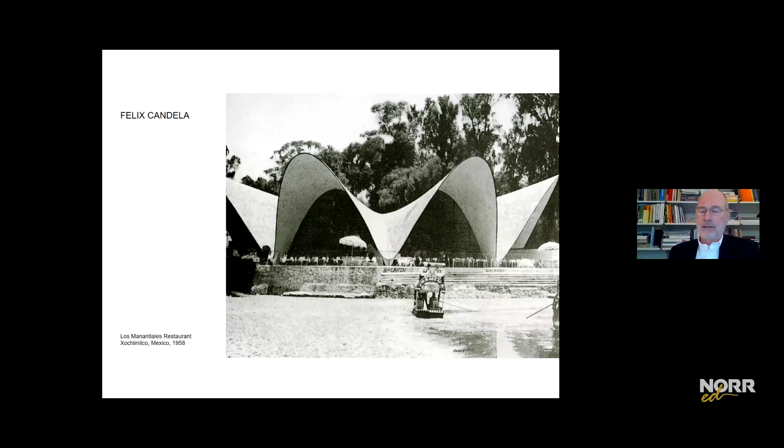Or the work of Felix Candela, which is these incredible hyperbolic paraboloid shells with amazingly thin edges, that has been there for quite a while, since 1958.

Now, in recent times, I have to say there's been some additions, but I'm not quite sure how to describe them. Is it about a purity of structure, or just what is it we can do?

And this makes me think about the movie Brazil, and I urge all the young architects on the call to watch the movie Brazil. It has a lot of architectural overtones.

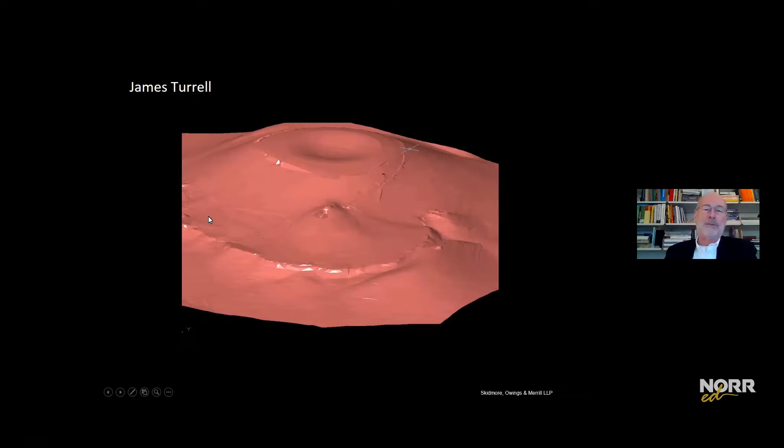The nature of the design, the purpose of this is to essentially be a lunar observatory to watch moonrises and moonsets for the next 2,000 years. It has a dome over the top, and in section it has this 40-foot diameter, 12-meter sphere where the light from the moonrise comes and projects against the back surfaces. There's a lens in the front, and when we got involved, James had the ideas together, but it was a bit of a train wreck.

Things were kind of crashing. There were a lot of ideas, a lot of things there that were kind of getting jumbled together. So what we focused on was giving it a hierarchy, where when things had a conflict, the sphere was alpha. It was number one, it got the right of way, followed by a cylinder around the outside, that was number two. In the process, we made it organized.

Then James and I were making a presentation to a potential donor, and I described what SOM brought to the table was Miesian order. Now, I said that because I grew up in an office where a lot of people came into Mies van der Rohe's office. Some of my mentors were important players in Mies van der Rohe's office. So I said that, we gave this Miesian order, and James corrected me.

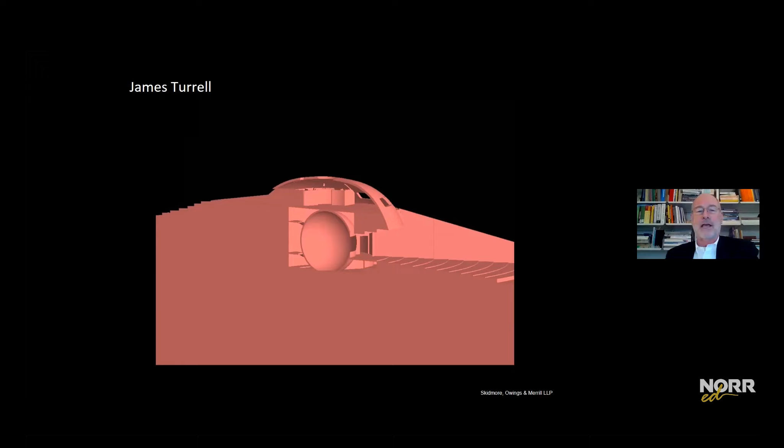Since I'm not Quaker, I can make a very gross generalization of some of their Quaker values. But can you imagine that if you were a young boy raised to believe in simplicity in speech, clothing, food, and your mother always said to you, 'step into the light.' And then later you became an artist, maybe no longer religious, but you were raised with this ethical situation. What might you create?

Here is one of James's creations. What you see here floating before you is a pyramid of light, and it is so simple that it doesn't even exist. This pyramid is created by your eye. What it really is, you have light behind the wall that's illuminated. You see it in the corner of the room, and it is your eye itself that creates the pyramid.

So I look at this artwork and I see it as the manifestation of these values in which he was raised, of simplicity and stepping into the light. And that made me start to think about what is it that I value, or what is my ethical position, not unrelated to aesthetics, and how does that affect my aesthetic position? So I started to examine the things that I value.

Here's another project we did with James down at Rice University a few years ago. Once again, simplicity and light. So I proposed for myself a set of values that I think were the things that I value and how they relate to art and architecture and engineering. As an engineer, I believe in efficiency.

It's great, it's terribly rewarding. It's kind of what we're trained to do as engineers, to do something efficiently.

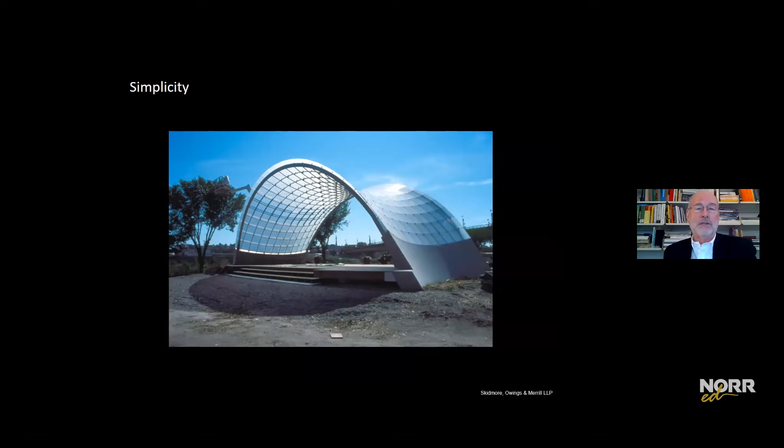Or simplicity, such as this band shell we did with Jamie Carpenter. Or minimalist—I like minimalism, such as Mies's Farnsworth House near here in Plano, Illinois. Or economy.

This is the Exchange House project in London, mentioned earlier. This is amazingly, for what it's doing, an efficient structure. It spans 78 meters over the trains coming in and out of Liverpool Street Station. Without an efficient structure, it would still probably be open to the sky, a kind of a wound in the middle of the city of London.

I believe in elegance. As you go across the prairies here in the Midwest or in Western Canada, you see these incredibly elegant irrigation systems—totally functional, but totally elegant.

I believe in utility. You go back to Vitruvius, his three values: utilitas, firmitas, venustas—utility, firmness, and commodity, and delight.

I believe in that—things should have a harmony, a rhythm to it. I believe in hierarchy and order, but not in the hierarchy of ideas. I don't care who the ideas come from, a summer intern or a partner, doesn't matter. But I do believe there's a hierarchy and order to how we tell the stories of our buildings, and not everything is equal. I'll speak to this more later.

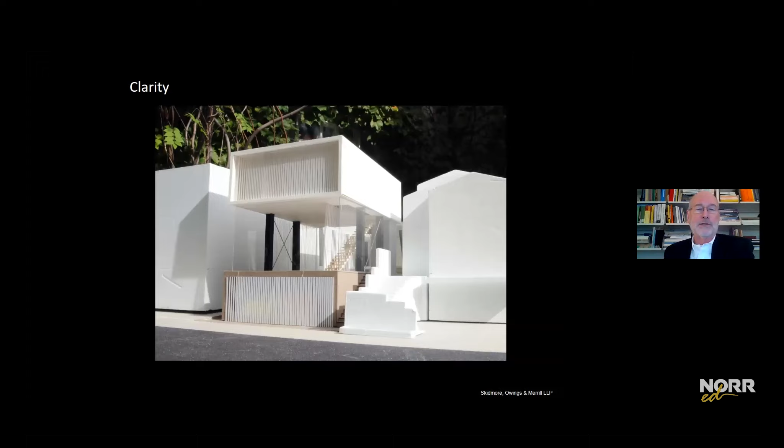I like clarity—I like where you can see what is happening, and how the loads for this residential project I worked on with Jeanne Gang, where we're trying to take the seismic loads, this is in California, from this sleeping unit above down to the living unit below.

Proportions, very, very important. This is a house I did with Thomas Phifer in New York.

Appropriateness—now it's hard to come up with what's appropriate, so I found a photograph of something which is, for me, totally inappropriate. I hate when people use structure as decoration and not the real thing. Whoever built this house definitely wanted it to have a colonnade up front, so here you have it—makes no sense structurally. I think it should be appropriate, and try to avoid inappropriateness. And for the life of me, I can't figure out how that garage works either.

I do like rational designs where it's very clear and organized, such as the John Hancock building here in Chicago.

One of the things I think is important in my position is that if you want your design to actually get built, you should have at least one idea of how to build it. I think this is a very important part of the design process—considering how it's going to be built, and making that integral to your design.

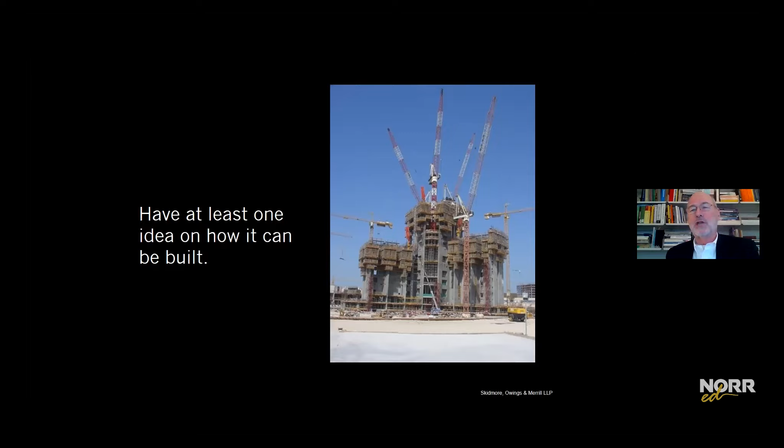That was true of Exchange House, or this is the construction site of Burj Khalifa. We had formwork on this project that was used 160 times, and that was central to the original design.

For the young architects and engineers on the call, don't be afraid to re-examine past systems and solutions. Seems like every time I work with a young designer, they would like to do something that's never been done before. Well, don't constrain yourself that way, because one could say the chair problem has been solved—there's no need to ever design another chair.

Well, Corbu had another idea, and there are other ideas within a fairly narrow design problem. Okay, some places you sit, sometimes you've got a back support, sometimes you don't—but a very narrow design problem. In fact, right now I'm trying to work on the design of a chair. It's quite a wonderful exercise to go and replow the field that's been plowed by so many other people in the past.

Another thing I find very helpful is what I call describing your design in words. But you don't want to do this too early. One of the things I do when working on a project, when I think we've got it kind of figured out—when it's starting to come together and the ideas are starting to gel—I try to describe it in words. And if it takes too many words, maybe I'm not there yet.

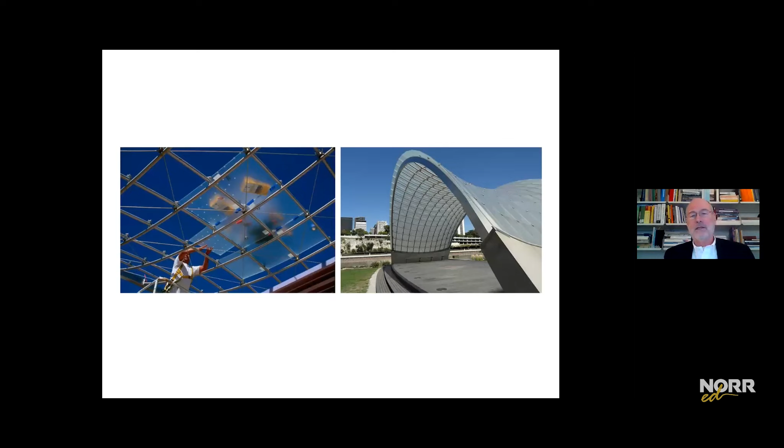Or the simplicity and clarity of this art piece we did with James Turrell, or the Jamie Carpenter band shell, or this Tower of Hope that we did with Jahn.

A very, very important topic, which I don't think is addressed nearly enough, is the issue of scale and form.

Let's start with issues of scale. On the left is a drawing actually made by Galileo, I think in 1638 or thereabouts. You look at this, and is that right? Well, it turns out, depending on your assumptions, it is right.

If you had a bone that was a cantilever, say cantilevering out of my hand, and let's say it's right at the breaking stress, and it's solid, and for the moment round, and the weight on it is its own weight. So if I decide to make it 3 times longer, as in this drawing, it has to get bigger. But as I make it bigger, it becomes heavier. So under that set of rules, if I make it 3 times longer, it has to be 9 times wider.

And that's what Galileo has done here in his drawing experiment. And of course, the very famous book by D'Arcy Thompson on Growth and Form. I've got, I think, probably 3 copies—one in my downtown office, one in my home office, and another in the living room of my house.

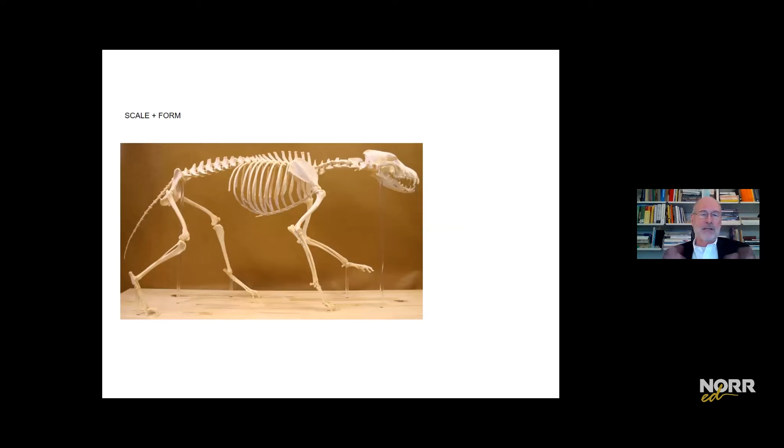And certainly as you scale things up from, let's say, here is a small mammal, if you go up to the scale of a large mammal, the proportions change.

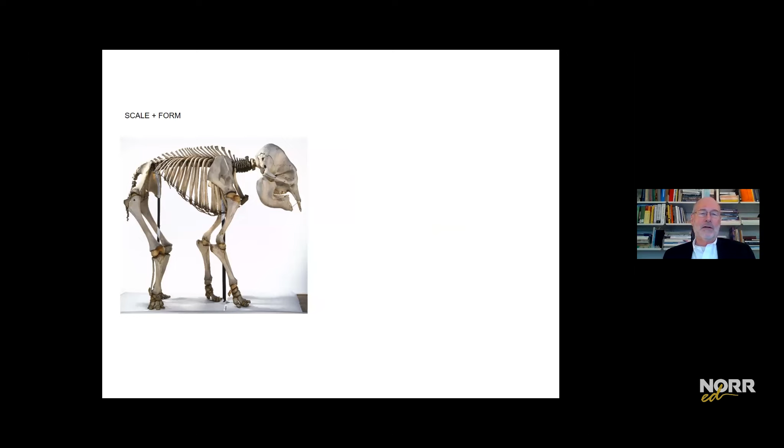As you scale up, another reference for me is Myron Goldsmith, going back to an essay he did for his master's thesis under Mies van der Rohe, on issues of scale in tall buildings. It has some very seminal ideas that he repeated in his monograph from Rizzoli.

Going back to Myron, when he did his thesis under Mies van der Rohe, he talked about issues of scale. He has a series of drawings of bridges depending on the span, with different solutions, and asks: what is the appropriate solution for that scale?

Now, this thesis was done in 1953, and you'll notice there's a very common structural system that was not common then, that's not on the chart. You might notice there are no cable-stayed bridges here, which have since become dominant.

Even though the idea had been around for a while, it really became prominent after World War II, when the Allies managed to blow up all the bridges across the Rhine, and some very brilliant German engineers needed to span these rivers with very efficient structures. That's when the cable-stayed bridge came into prominence.

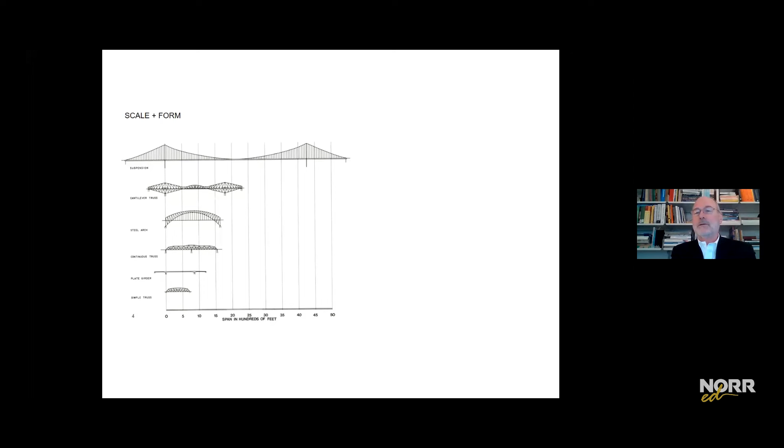So when I look at these, I think of them not as solutions or systems, but perhaps as species, like animal species. Unlike nature, where one species evolves from another, we in design—architects and engineers—can create a whole new beast, animal, or species just by creativity and respecting physics.

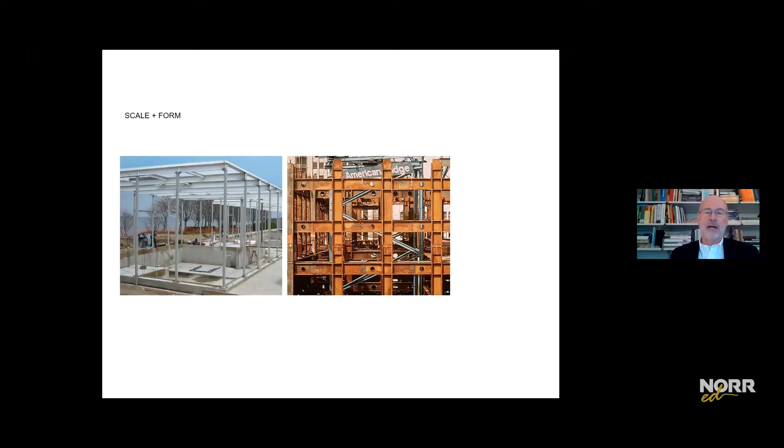And certainly scale and form shows up—on the left is the scale of the bones of this house we did with Tom Pfeiffer, and on the right, the scale of the bones of the Willis Tower, the Sears Tower.

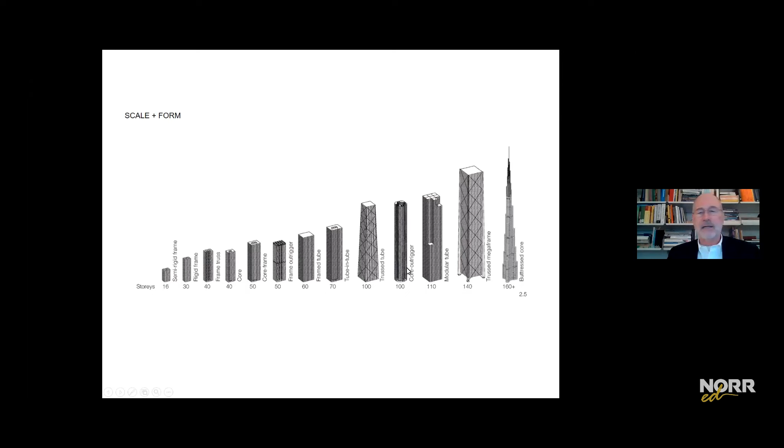And so when you look at a chart like this that was started by Fazlur Khan, I think inspired by the work of Myron Goldsmith, we have these different species of potential solutions for tall buildings, depending on how many stories there are or how tall they are.

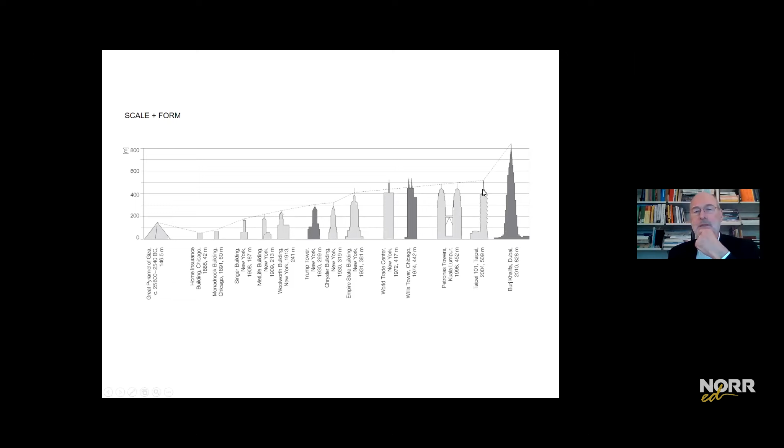And certainly over time, we've been able to evolve in the height of buildings. Here's a chart of nominally some of the tallest buildings in the world in their era. You might notice that the Burj Khalifa is substantially taller than whatever came before it. The reason that was possible is because we looked very seriously at the issues of scale. If we had taken an existing solution and just scaled it up, it would not have worked.

For instance, if I were twice as tall, I'd need to be twice as wide and twice as thick, and I would weigh 8 times as much, which is why scaling doesn't work. You can't just scale things up. You have to create something new.

This particular solution doesn't have to scale by the cube, it only scales by the square. So if I were to make it twice as tall, I'd have twice as many levels. The wings would have to get longer, but not necessarily any wider. So this type of system is scalable by a different rule than say Galileo's bone, or a building like the Sears Tower.

As Silvio was kind enough to point out, we've had this exhibition move around the world, where, as those of you in practice know, whenever you have a client meeting, you make a model that's maybe a foot tall, or a foot and a half tall. And that model doesn't matter if it's a 10-story building or a 100-story building, the model's the same height. So what we decided to do is make a series of models of buildings that were all at exactly the same scale, 1 to 500. And we also decided to just model only the structure.

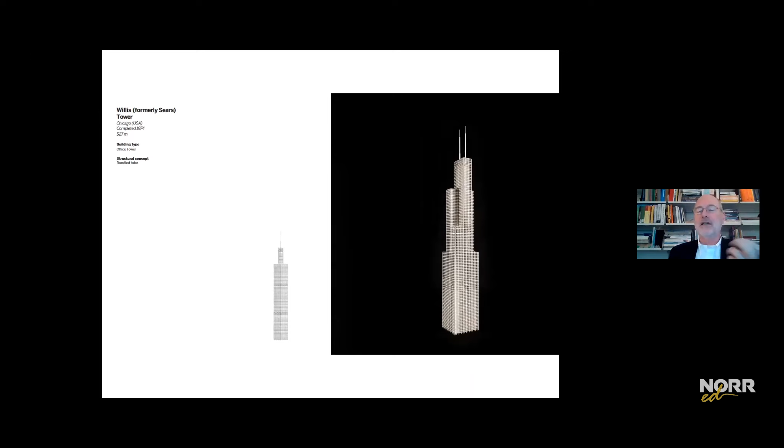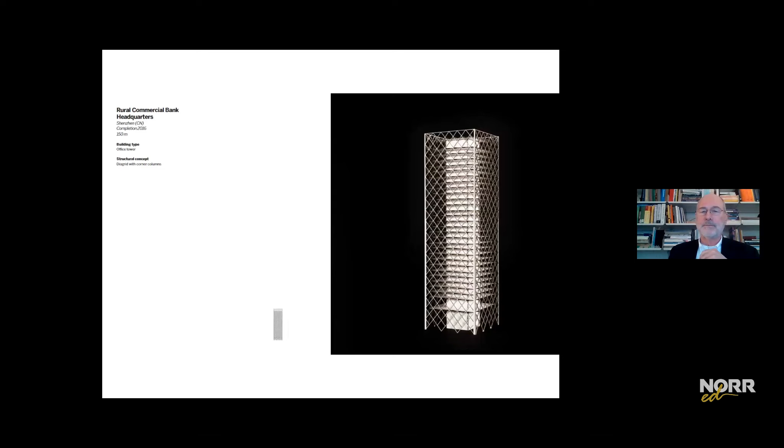This is the Chestnut DeWitt Tower I mentioned earlier. This, of course, is the Willis, or the Sears Tower. Clearly, the architecture is still there without the skin. This is a project I'll talk about in a moment that we did recently in Australia. Another one we just finished recently in China. Another one finished a while ago in China. And of course, like all designers, some of my favorite designs of all time were the ones that didn't quite get built, such as the Lotte Super Tower, a diagonally braced tube of a building that went from a square to a circle.

Another very important topic is hierarchy and order. Once again, I'm not talking about hierarchy in the sense of who comes up with the ideas, but hierarchy in the sense of how we tell the story. So let's talk about the Hancock building in Chicago, its hierarchy and order.

Clearly there's a clear expression going on here of the verticals, the diagonals, some horizontals, and certainly the corner columns. When you look at the Hancock, it's important to remember what we call the rule of the Hancock, which means that every time a vertical crosses a diagonal, it happens at a floor line.

And because of that, you're able to move vertical loads, at least the symmetrical component of vertical loads, anywhere you want. So you can put all the load in the corners, or bring the load from the corners to the individual columns, however you wish, by proportioning the columns, and the load will go to that column.

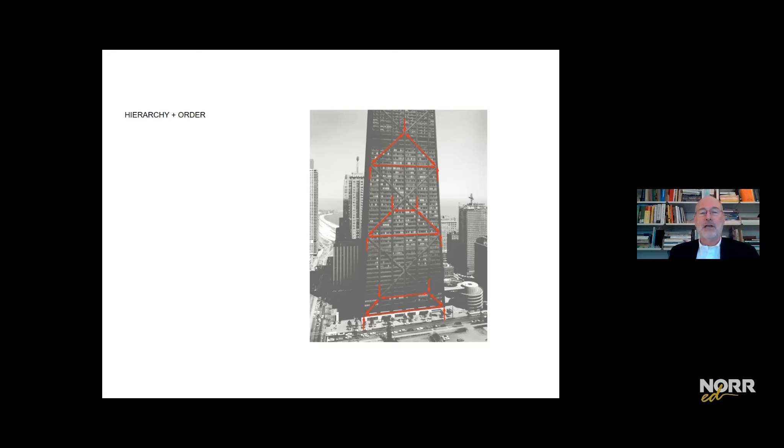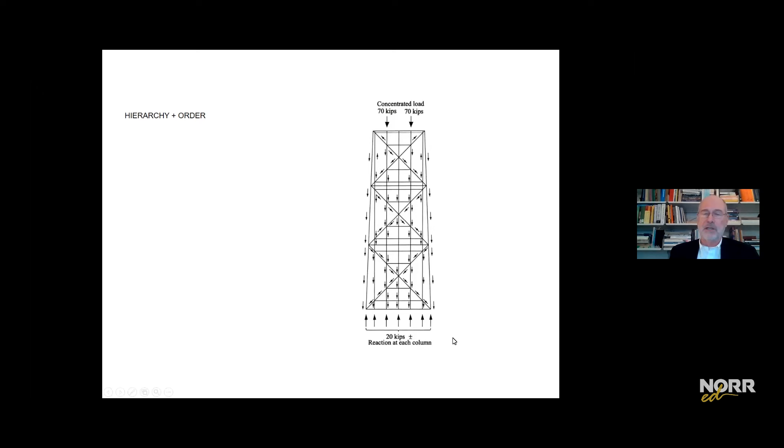At least the horizontals in between the diagonals are very important for moving loads around. There was a discussion about this, though I was not part of the design—it's before my time—about what to express and what not to express. Here's a diagram from our archive showing how loads at the top become equally distributed by the time you get to the bottom because of this technology. And here's a construction shot, not unlike the model I just showed you a minute ago.

Sometimes we have a couple of phrases here in the office. One is what we call the Dolly Parton quote. As I said earlier, to make something simple is not easy, so the quote we use is: it costs a lot of money to look this cheap. That's the Dolly Parton quote. Another quote we have is, we used to say you have to lie to tell the truth, but now we say sometimes one must distort to make clear.

Let me go back to the Hancock. Here's a construction photo of the Hancock. It has one basement level, and you have the sunken plaza—or no, let me take that back. This, essentially, is the ground level, and this is one level up.

Structurally, the right thing to do is for this diagonal to hit the column down here in the basement. But it would look ridiculous, because you'd come up to the building and see a diagonal disappearing into the pavement—what does that mean? So instead of doing the most pure structural solution, in order to tell the story of the building and the structure, a little distortion was made to make the story more clear. Not only was the diagonal brought up out of the basement, it was put one story in the air.

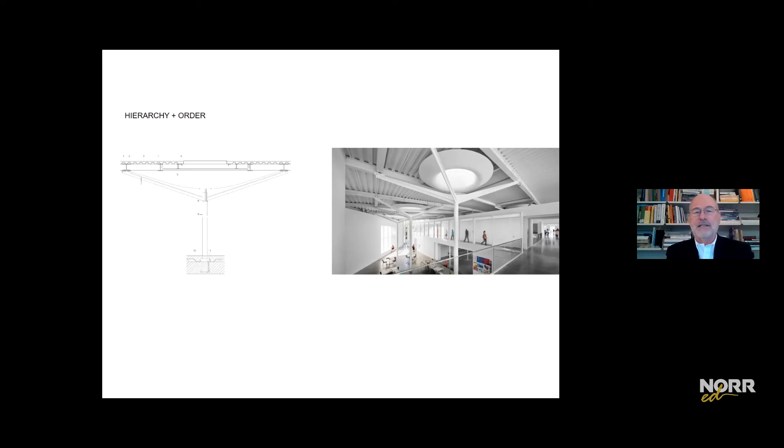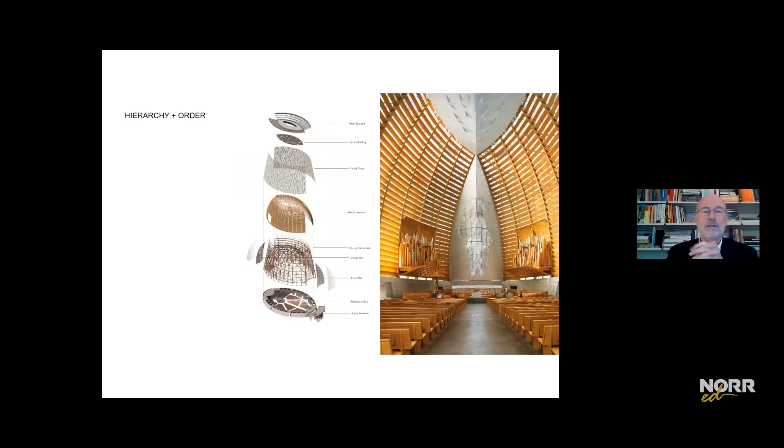Here's another project we did—this is Clemson School of Architecture, where we express this upside-down pyramidal structure centered on the skylights to express the hierarchy. Or this cathedral we did in Oakland, California, where you have the hierarchy and order of all the systems layered together. Or the project we did in Detroit for General Motors, showing how the systems come together in their hierarchy and order.

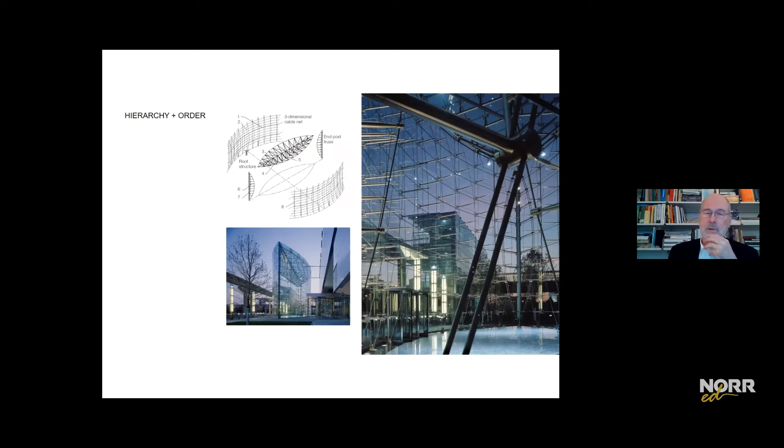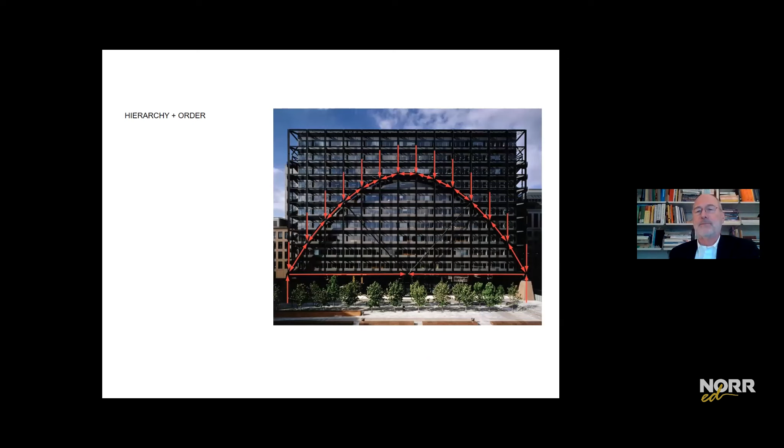Let me talk a bit about Exchange House in London. The reason it's a bridge is because it covers over all of these tracks, in the switching area, where the train tracks don't really line up in an organized manner. Fundamentally, it's a tied arch, and so that is the most important aspect of this building—the tie, the arch, and the abutments.

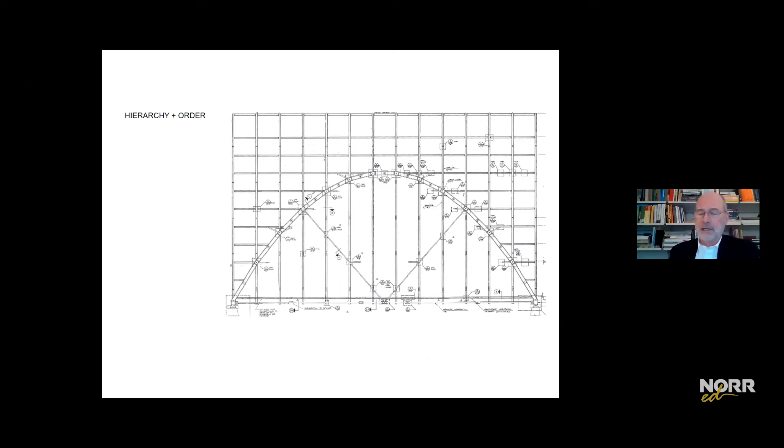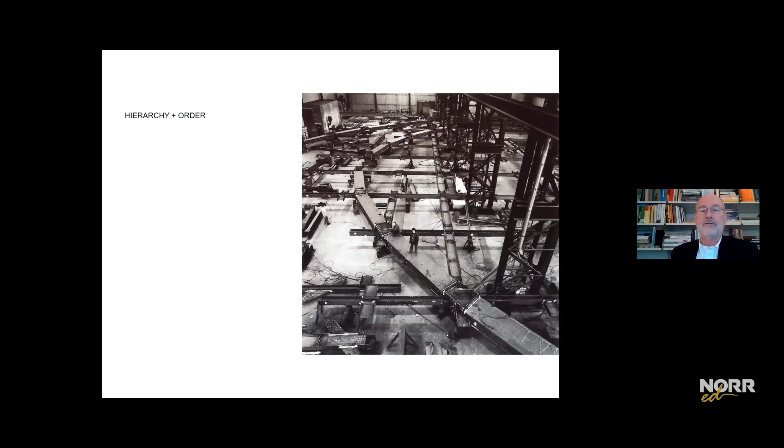Here's the working drawing we did for this, where we thought quite a bit about trying to tell the story of the structure through the architecture. We had them pre-assemble the arch before it was shipped, to be sure there were no tolerance errors in the field—the last thing you want is to have that up in the air and have something not fit. So here they are pre-assembling the arch in the fab shop, and here it is being constructed.

Let me talk about this particular connection, which took a long time to come up with. Everything you see here is essential, but not equally important. This column back here is essential, but not as important as the arch or the tie. The alpha family, so to speak, was the arch, the tie, and the abutment, and they are clearly given prominence. The columns and other members are essential but not equally important, and they're held more quietly. This applies not only aesthetically but technically—a lot of times, as an engineer designing a connection, you have to decide who gets the right of way.

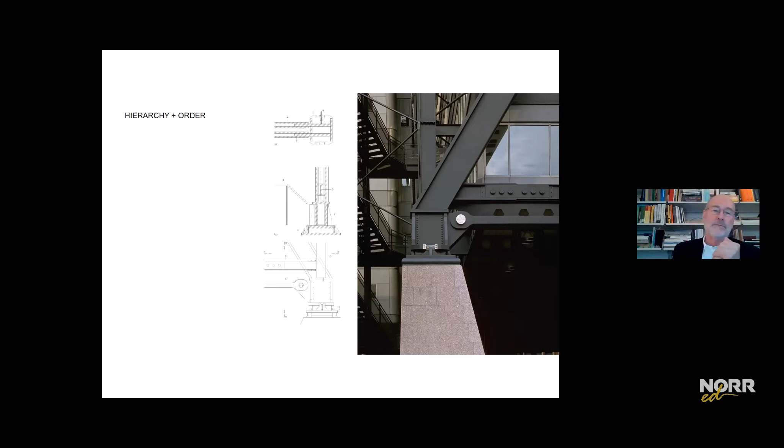I hate splicing tension with welds, because you increase your risk. So maybe the tension member gets to go through and the compression member is interrupted, because our compression load connection is much more reliable than a tension connection.

Efficiency and economy, which is the heart of all of us. David Billington from Princeton always had the quote of efficiency, economy, and elegance. Well, let's hope elegance is always there. That's kind of the starting point.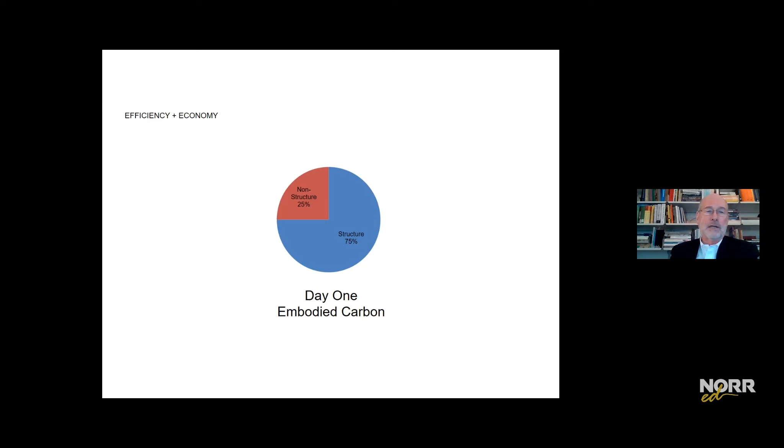But efficiency and economy, particularly today, where we're worried about carbon, and the most important carbon is the carbon we spend today in the built environment, and most of that embodied carbon on day one is structure. So we've been doing a great deal of work in trying to come up with more efficient tools for more efficient design. But efficient design can lead to beautiful architecture.

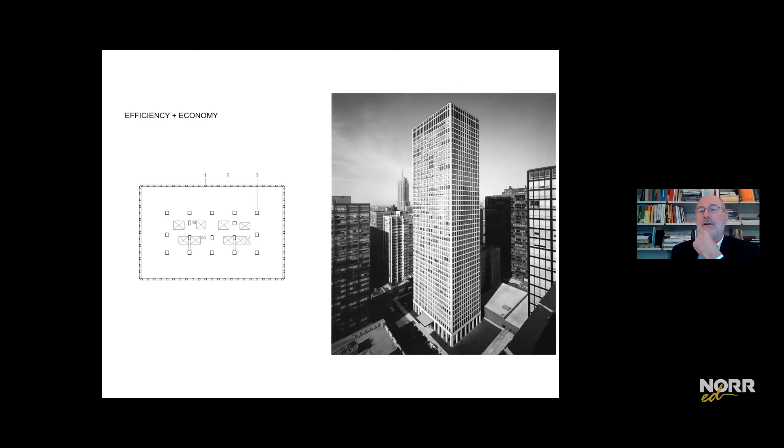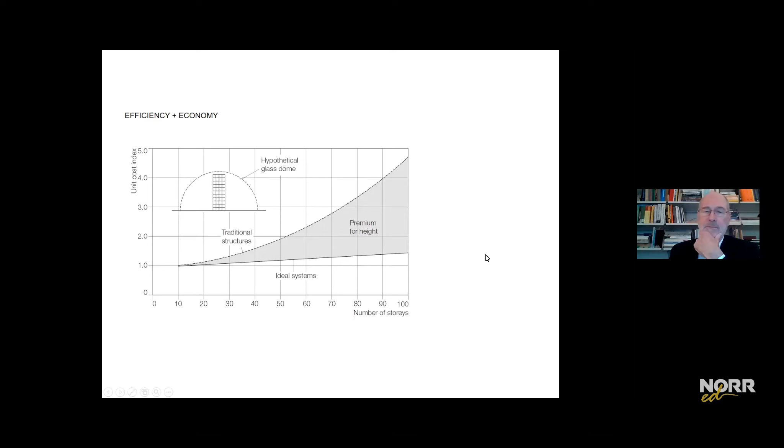That was the basis of this work by Fazlur Khan and Myron Goldsmith in creating something that minimizes the premium that's required for height. As you go higher and higher, how can you minimize the premium that has to be spent because you are taller? I'm totally convinced that the most important parameter in the design of efficient architecture and engineering is geometry.

Geometry is where architecture and engineering comes together, and it's a huge issue. We talk about three components: topology, shape, and size. First, you have a design domain - where can the structure exist? Then topology, which means what is connected to what. Then shape, which is how you take that topology and shape it. Finally, you size the members and the connections.

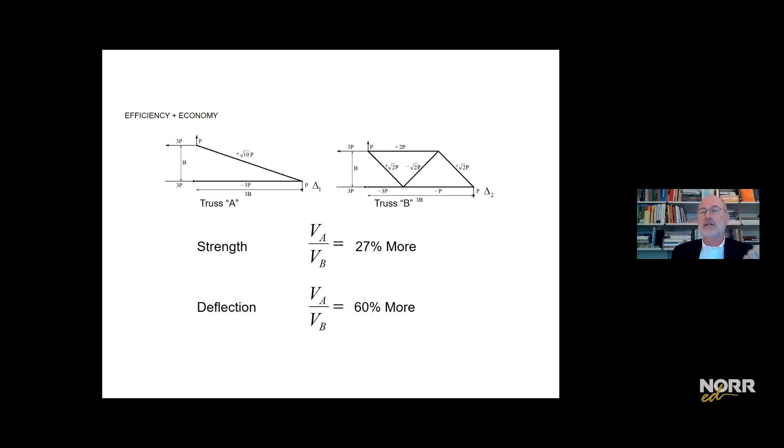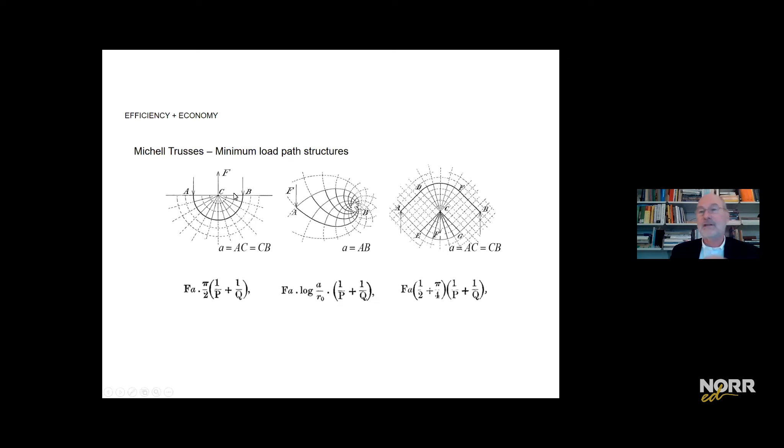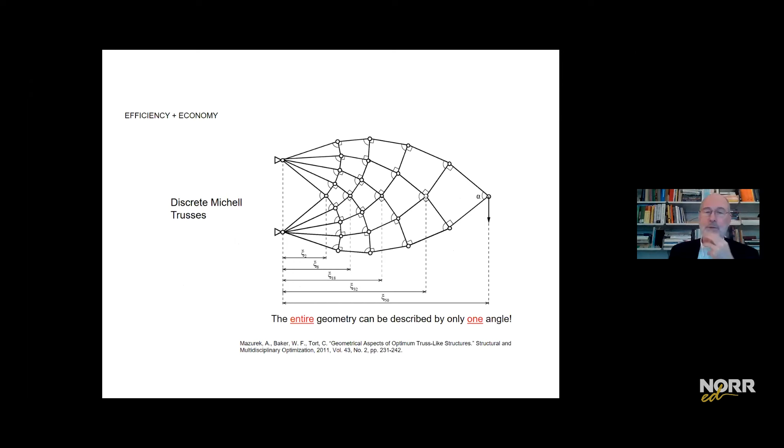So we've come up with discrete solutions, which are kind of unusual - things we're not comfortable with, things we're not used to seeing, which are more efficient than what we're used to seeing. And how do we explore these? We've been taking this into some of our newer buildings where we study this.

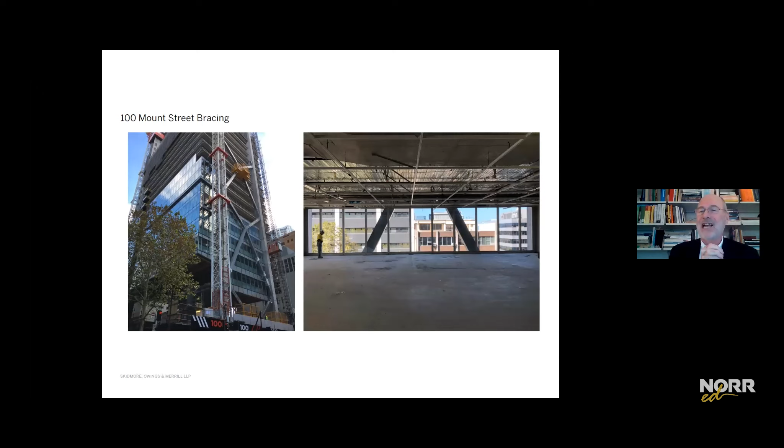For instance, here's a project where we took this research - a concrete building that's braced by steel, which is a conversation all by itself. You might notice it's a high-waisted brace, not an X-brace, because it's more efficient, because nature likes to turn the loads gently. So the wind load comes in, turns downward a little bit, hits the building in the middle, turns down again, and finally hits the far side and turns vertical. In this process of turning the load gently, you get a much stiffer structure, and that needs less material.

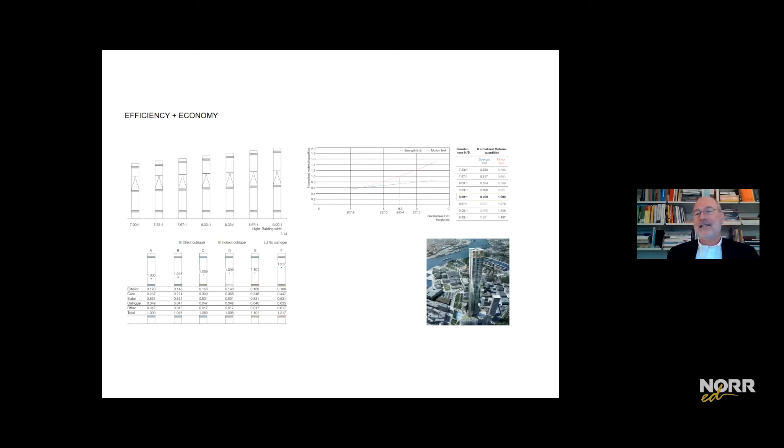Also, it's important - people like to do very, very slender buildings. At some point it becomes very expensive, because the amount of material you have to add to the entire building for that last floor is a very important thing to consider, and you should be very cautious about when you build very, very slender towers.

One of the things is, can you get rid of whole systems? Here's this house that we did with Tom Phifer, where the column is actually a 60 millimeter square solid steel bar stock, but only 60 millimeter square, that holds up both the roof and the cladding. A lot of times in architecture, we're worried about liability and trades, and getting the trades to talk to each other.

Normally you would have a column and a mullion, either one. This is, in fact, when I came up with this idea, because I used to do most of my preliminary engineering by hand calcs. I was sizing the mullion because they have hurricane winds up in New York, and I said, well, this can hold up the roof. So I'm either going to get rid of the column or the mullion, or I'm going to have one element that does both. I recently did this.

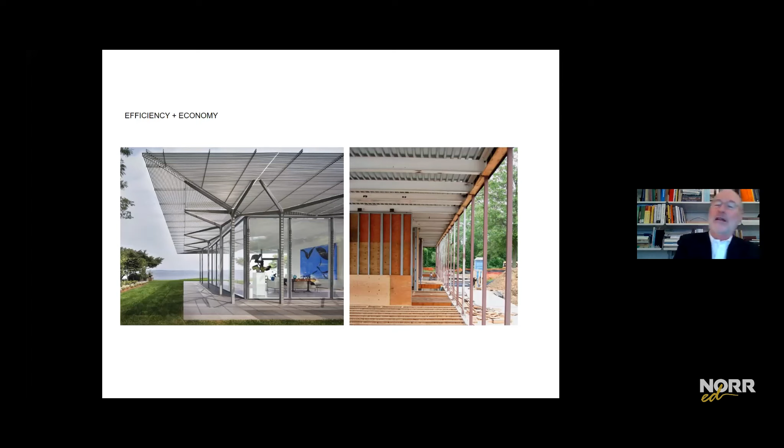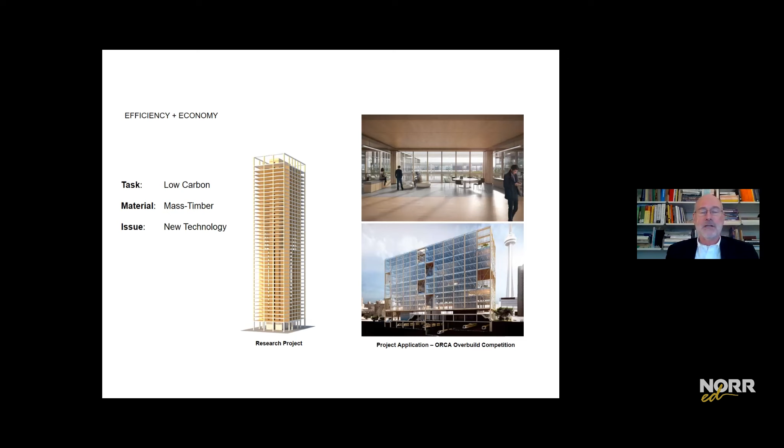Certainly timber — there's a lot of good timber being done in Canada. We're doing a lot ourselves, particularly on the West Coast, but we also did a lot of fundamental research into how to get timber into tall buildings. This research project on the left was based on the same program as that concrete building I showed you earlier, the Chestnut DeWitt building, done almost 50 years ago. We're becoming convinced that the right way to spend timber is in the floor systems, because that's where you get the best benefit for the limited timber we have today.

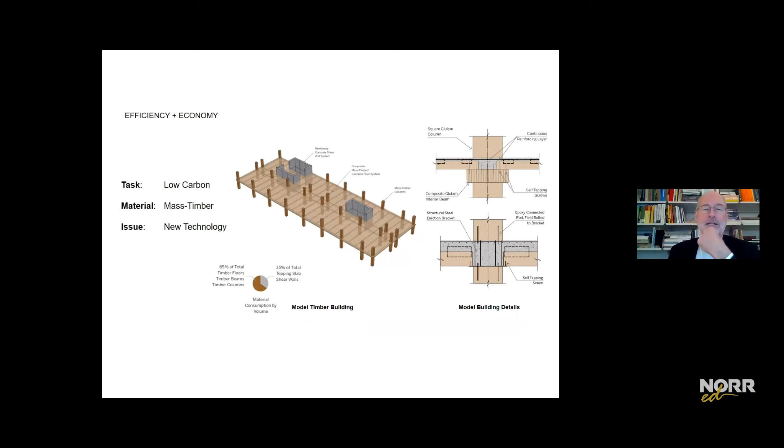Let me finish up with a little bit about the Burj Khalifa and what we have on this. It's primarily a concrete building, a residential building. It's certainly pretty extreme. Were we facilitators of dreams or enablers of excess? We try to be the first and not the latter.

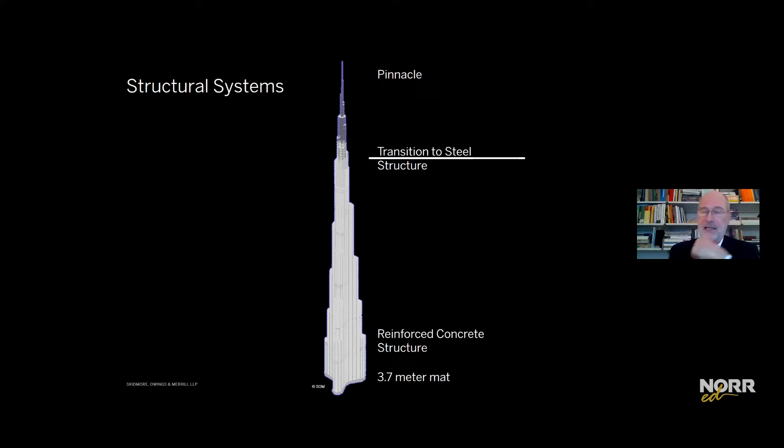It's a very minimalist system — some walls, some slabs, and a few columns. If I did it again, I'd get rid of the columns too — simple things arranged in a different way. We came up with a structural system which, after quite a bit of work, a lot of this was determined through working with interior designers on how it laid out, because we actually started with different initial assumptions, and then it evolved into this.

We called it a buttress core. Here's this hexagonal core in the middle. The core does a very important thing: it keeps the building from twisting, like an axle. The most perfect axle is a circle, and a hexagon is pretty close. So it's very, very stiff and won't twist, but it's much too slender to go to great heights.

So we ended up buttressing it with three wings, where we had web walls, if you will, going down the corridors. Then we had demising walls between the units which we used like flanges, like you'd have on an I-beam.

As I said at the beginning, my firm is called Skidmore, Owings and Merrill, but the initials are SOM, which in reality means 'stay on module.' SOM is all about the module. Here, this was a 9-meter module. At first we had an 8-meter module, but eventually it morphed, mainly driven by interiors, into a 9-meter module.

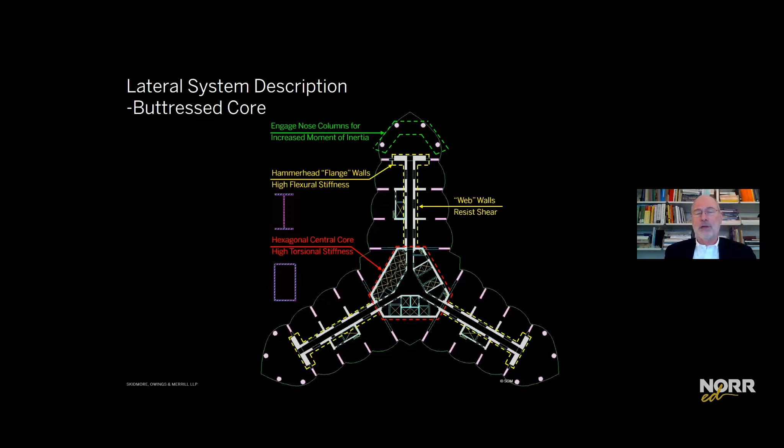This is a section through one of the wings. This is the middle of the building, this is the extreme, and we forced the gravity loads outward. Gravity is amazingly reliable — you can always count on it. So we managed the gravity.

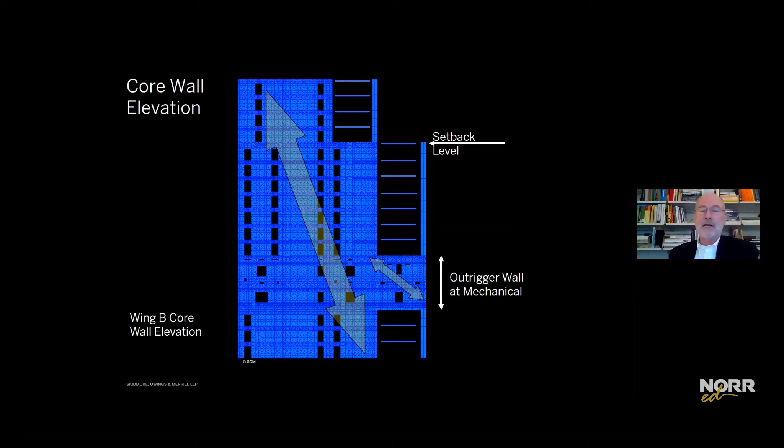But even in a windstorm that happens once every 1,700 years, we have no uplift in the building because we were able to use the weight of the building effectively. And as everyone knows, the most expensive thing in reinforced concrete is not the concrete, it's usually either the formwork or the rebar, often the rebar. Because of this, we were able to minimize the rebar.

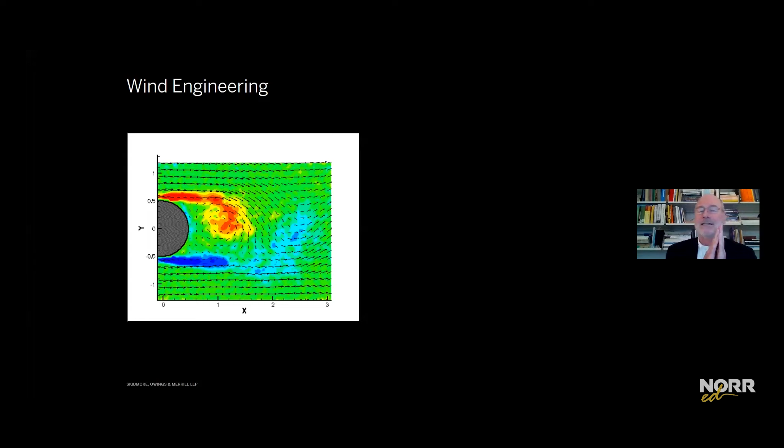Wind is the dominant thing in tall buildings. As wind goes past an object, you get this buffeting from side to side, and every time that does, it puts a pulse lateral to the building. If a tall building were ever to fall over in the wind, it would probably fall over sideways, not in the direction of the wind, because of this pulsing, which is like a child on a swing.

Because of the geometry of buildings, the range of expected geometries, and the wind speeds you're likely to get in this world, it's highly likely you'll have a windstorm with pulsing vortices at the natural harmonics of your building, and you get a resonance effect, a harmonic resonance.

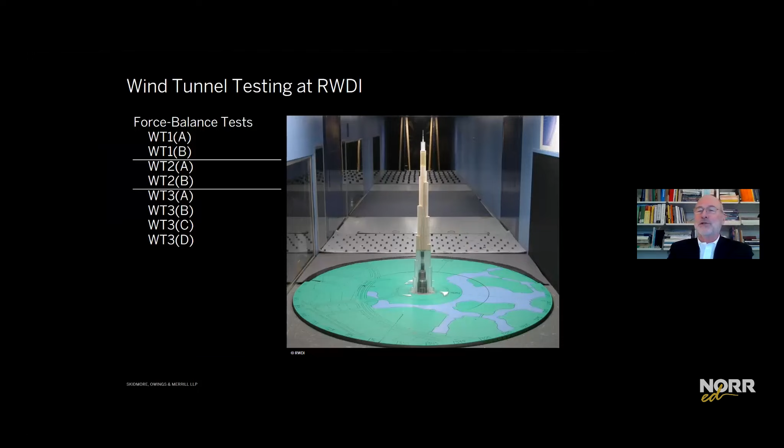So we did a great deal of wind tunnel testing, and we reshaped the building many times. We did what's called force testing. We did all this in Canada, very close to Toronto and Guelph, at RWDI's wind tunnel lab, which has a nicer facility these days. This used to be in a strip mall in Guelph next to a Chinese restaurant.

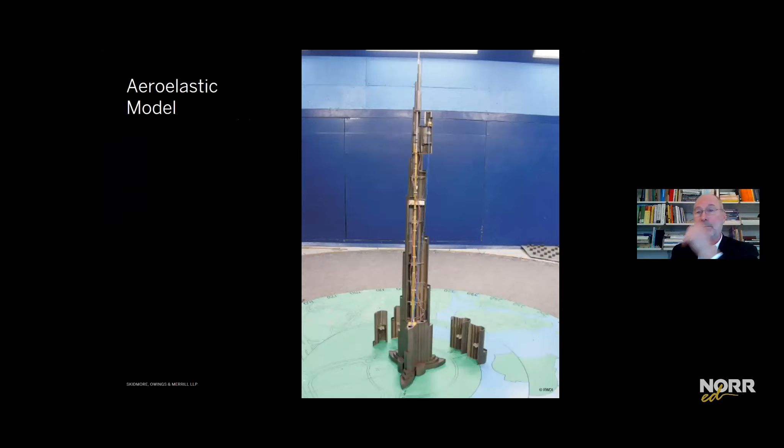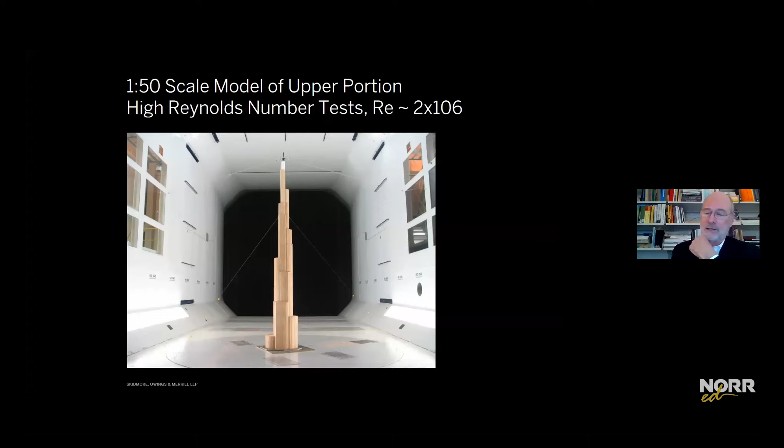We did some very sophisticated aeroelastic models where we could pick up the higher mode shapes. It's very important. We did some very special testing on parts of the building, down in Ottawa, in the 9-meter, 30-foot tall wind tunnel. There's Peter Irwin and some of the RWDI staff during this test.

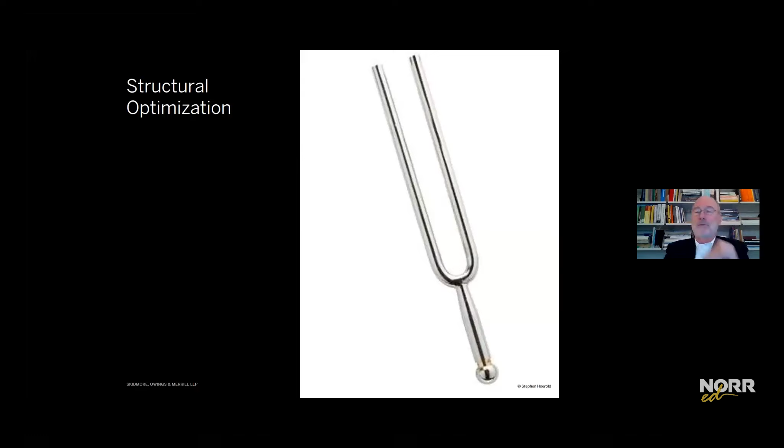On the structural side, we tune these things like a musical instrument, particularly the mode shapes, to where we want. In this process, we discovered the building has 6 principal directions. The wind going into the nose acts like a cutwater, and the vortex that forms would be downwind of the building and not particularly important.

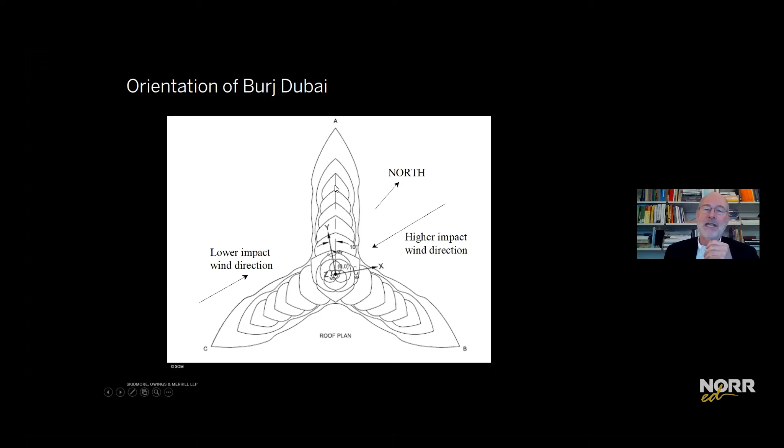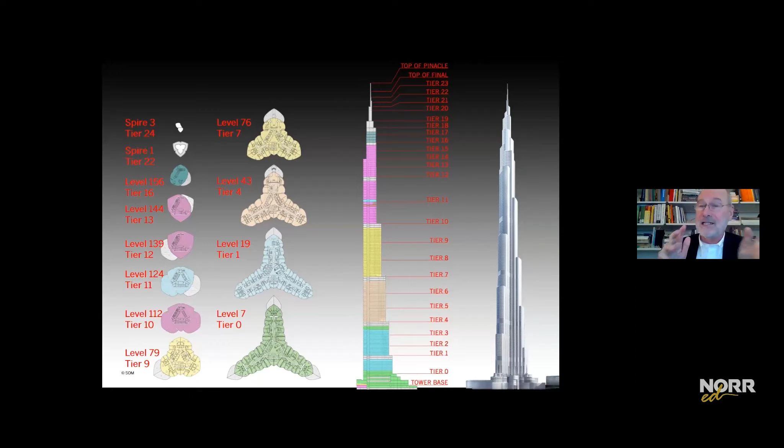But when the wind hit 2 of the wings, the vortex would form and push against the 3rd wing, and that was an issue. So we went through a lot of reshaping of the building through the design. Instead of a child having 2 feet that kick in harmony, this building has maybe around 27 feet, and they all kick at different rates, so you get much less forces.

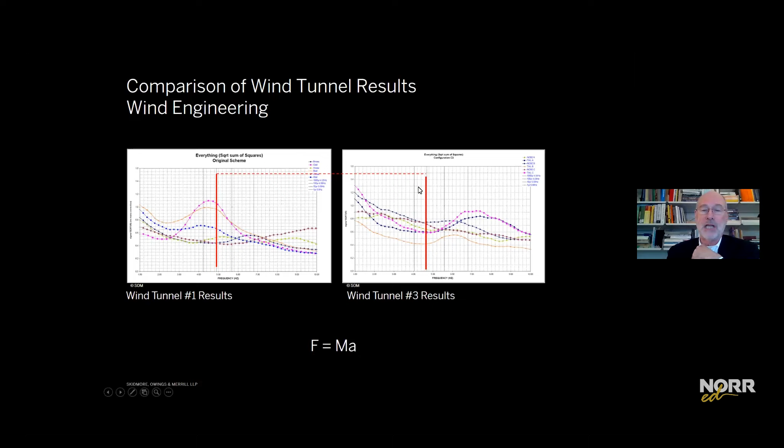Here's some of the testing we did, including one that was taller than we actually built. Our initial scheme, which did not work, we were able to grow the building by 310 meters, which is the size of the Eiffel Tower - that's a change in height. And our forces went down, and our moments went down.

One of the other parts of my philosophy related to this problem is I always hark back to the Hitchhiker's Guide to the Galaxy. In that book by Adams, you might remember what it says on the guide, the famous Hitchhiker's Guide itself: in bright bold letters, it says 'Don't panic.' That's one of my philosophies. When things go bad, and they will go bad, don't panic. It will not help. You just need to calm down, take some deep breaths, and address the problem.

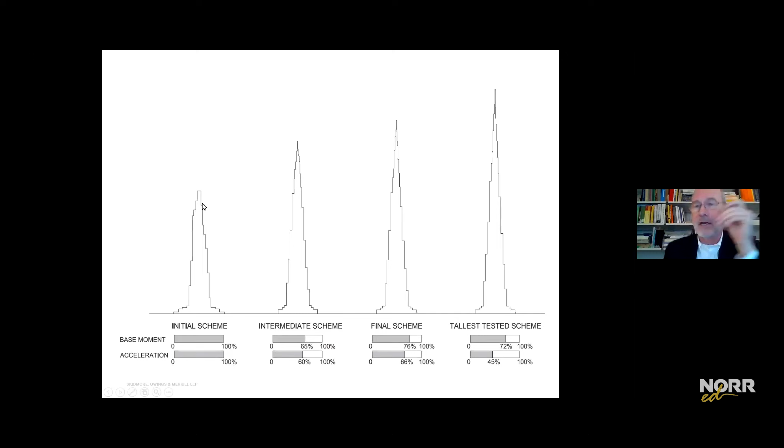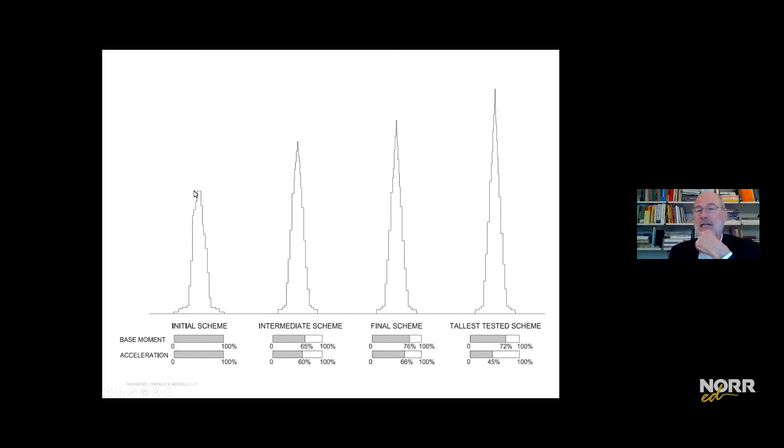The fact that the initial scheme did not work is probably the reason we were able to go so high, because if it had just worked, we might have just stopped, since this was the world's tallest building - 518 meters tall, 10 meters taller than Taipei 101. So check the box, world's tallest. But because it did not work and we had to make some radical changes, we were able to go much higher. Of course, the construction technology was phenomenal.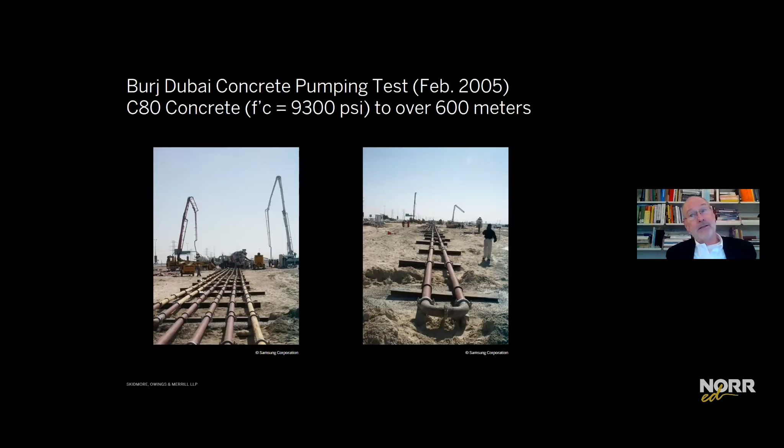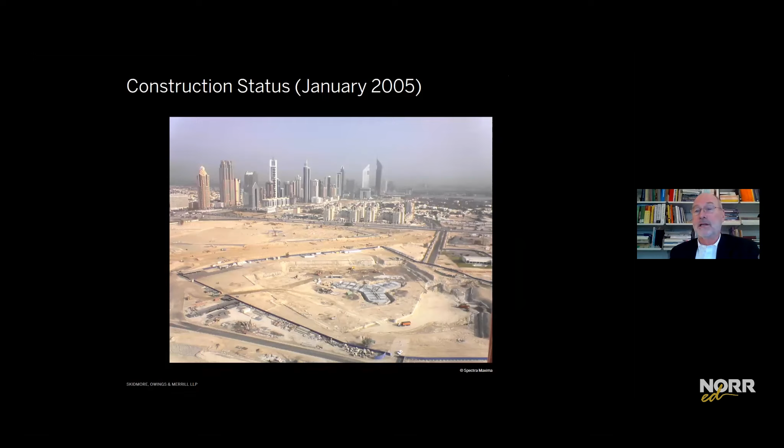They figured out how to pump concrete 600 meters, and it still came out as concrete. The construction was quite remarkable. The foundations went in early, and then it sat there while the owner was negotiating with the contractors. Then in April 2005, the main contractor showed up, Samsung, and went up, and essentially a vertical factory went up and up. Let's talk about the Burj effect.

Every day, thousands of people go to Burj. This area was essentially an abandoned military base. It was 1 square kilometer. And nowadays, you have this building with all this development around it. Every day of the year, thousands of people come there to see the lights, to hear the music, to experience it. So as it is today, one cannot imagine Dubai, the UAE, the Middle East, or I hope you would agree, the world without it. This incredible effect that this project has had on Dubai, and I think the world. And so with that, thank you, and I open it up to questions.

I invite Silvio to come back. No, thank you for that. It's that was a fantastic presentation, and it's not only I didn't know what to expect, but not only was it about engineering, but it was about architecture, and the design philosophy just flowed from one to the other, as I would have expected a firm that is about architecture and engineering.